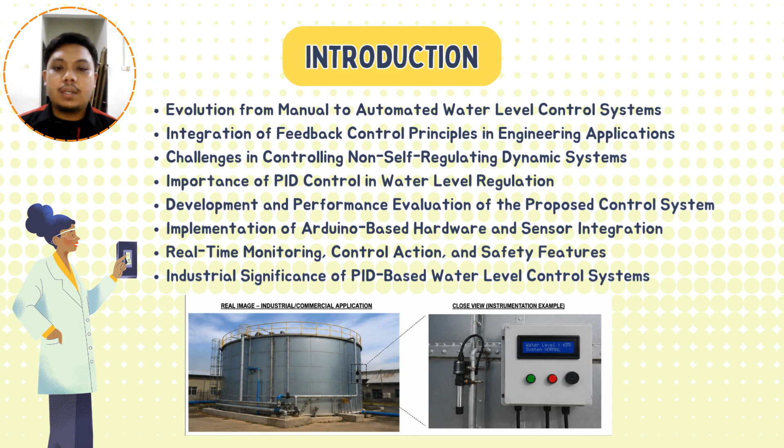Today I will continue this presentation about the aim and objective of the project. The main aim is to design a closed-loop water level control system using Arduino and a PID controller. In this project, a hardware and software integrated system is developed to control the water level automatically. The PID controller is applied to maintain the water level at the desired set point.

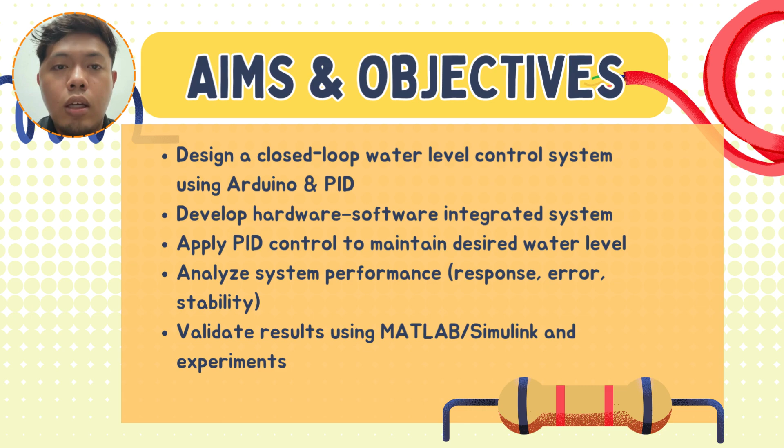Then, the system performance is analyzed in terms of response, steady state error, and stability. Finally, the system is validated using MATLAB or Simulink, and the results are compared with experimental data.

Assalamualaikum, my name is Uzma, and right now I will present the literature review. So, this project focuses on a water level control system which is commonly used in domestic and industrial applications to maintain the desired water level and prevent overflow. To achieve accurate control, a PID controller is implemented.

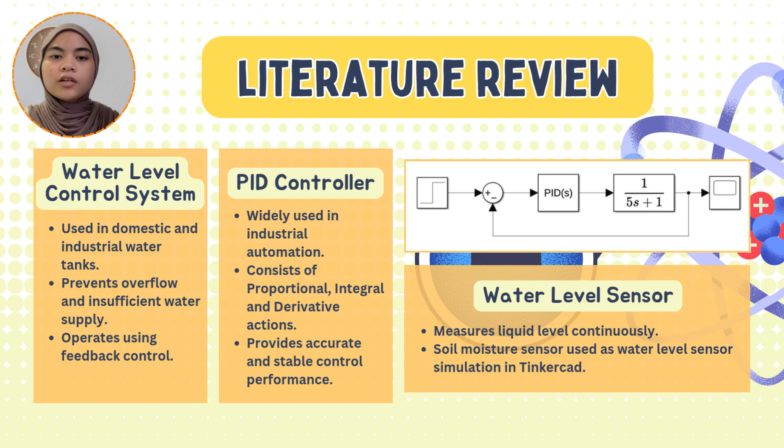PID stands for Proportional Integral and Derivative Controller. It is widely used in industrial automation because it provides stable and reliable system performance. In this project, a soil moisture sensor was used to simulate a water level sensor because Tinkercad does not provide a dedicated water level sensor. The sensor continuously provides feedback to the controller for monitoring and control purposes.

Right now, I will present the theory. So, the PID controller calculates the control output based on the error between the desired water level and the measured water level. The error is calculated using the equation set point minus process variable. The proportional gain Kp increases the response speed of the system.

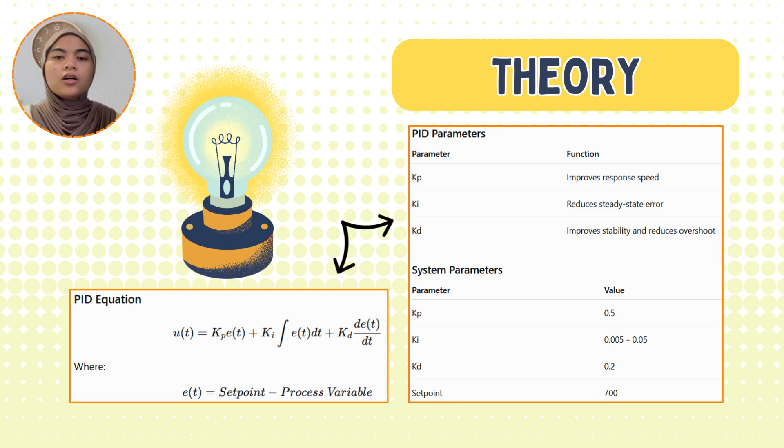The integral gain, Ki, reduces steady state error and helps the system reach the desired set point. The derivative gain, Kd, improves stability by reducing oscillations and overshoot. In this project, the proportional gain was fixed at 0.5 and the derivative gain was fixed at 0.2. Different values of integral gain were tested to investigate their effect on the water level response and overall system performance.

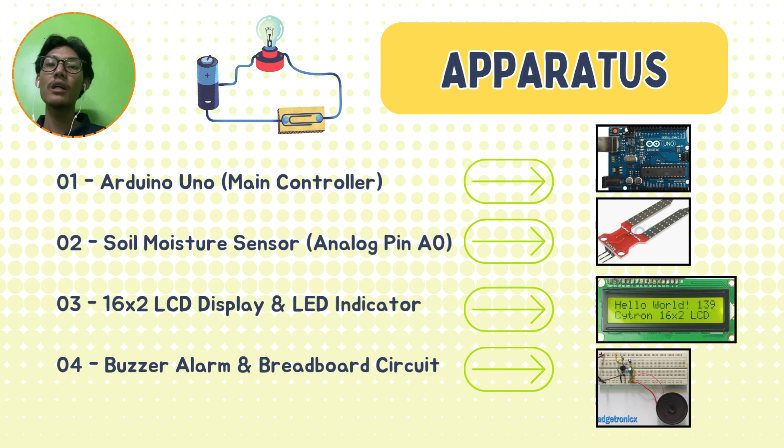The sensor measures the water level and sends an analog signal to the Arduino. The Arduino converts this signal using its 10-bit ADC, producing values from 0 to 1023. Based on this reading, the system displays the water level and activates different alarm states. When the reading is 500 or below, the buzzer remains off. Between 501 and 800, a slow beep is activated as a warning. Above 800, a fast beep indicates a critical water level condition.

So the next slide is the experimental method. MATLAB Simulink is used to create a closed loop PID control system. The proportional gain Kp is fixed at 0.5 and the derivative gain Kd is fixed at 0.2. Meanwhile, the integral gain Ki is tested at three different values: 0.005, 0.02 and 0.05. The water tank is modeled as a first order transfer function and the system response is observed using a scope block.

The performance is evaluated by comparing rise time, settling time, overshoot and steady state error. The results show that increasing Ki improves error correction speed but can cause overshoot. Among the tested values, Ki of 0.02 provides the best balance between fast response, low overshoot and stable water level control.

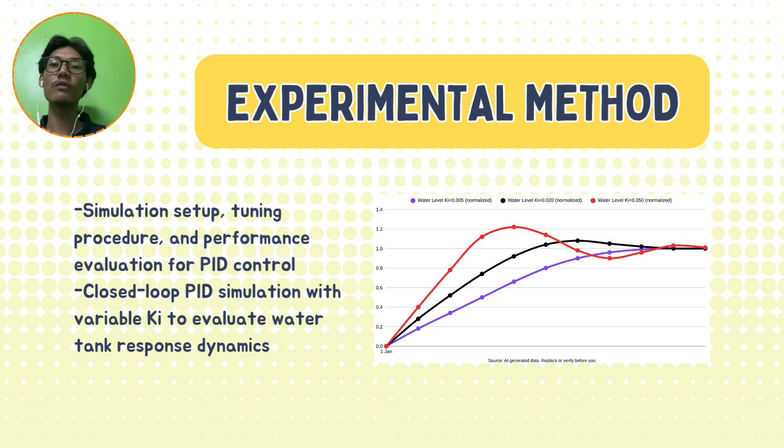Okay, for results and discussion, our PID controller successfully regulates the water level in both simulation and real experiment. The proportional term provides a fast response while the derivative term ensures stability with very little overshoot. The integral term plays a key role in minimizing steady-state error.

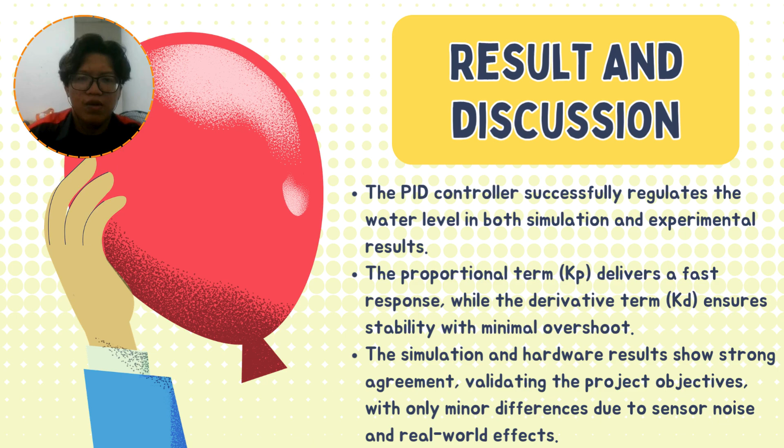Overall, the best performance was achieved by Kp equal to 0.5, Ki equal to 0.05 and Kd equal to 0.2, giving us excellent set point tracking and smooth response. Finally, the simulation and hardware results match well, successfully validating our project objective, with only minor differences due to real-world factors like sensor noise.

For the response graph from MATLAB, let's look at figure 7.4, which shows the PID controller output, or the controller effort, for the different tuning sets. As we can see, all three curves start with a high output of around 250 to 255 PWM. This aggressive effort quickly drives the system to the desired set point. As the error decreases, the control signal smoothly reduces and stabilizes at about 70 to 80 units.

Notice that the response with higher Ki settles at a slightly higher steady-state value, which makes sense because stronger integration is needed to keep the water level closer to the set point. The smooth decay without oscillation shows good system stability.

Now, moving to figure 7.3, this graph displays the error response for the three different Ki values. All responses show a rapid initial drop in error. However, with the lowest Ki of 0.005, the error decreases slowly and leaves the largest steady-state error of about 130 units. In contrast, higher Ki values of 0.02 and especially 0.05 reduce the error much faster and achieve a significantly lower residual offset, down to around 60.

This clearly validates the important role of the integral term in eliminating steady-state error. Importantly, there is no oscillatory behavior thanks to the effective damping provided by our Kd value, which is 0.2.

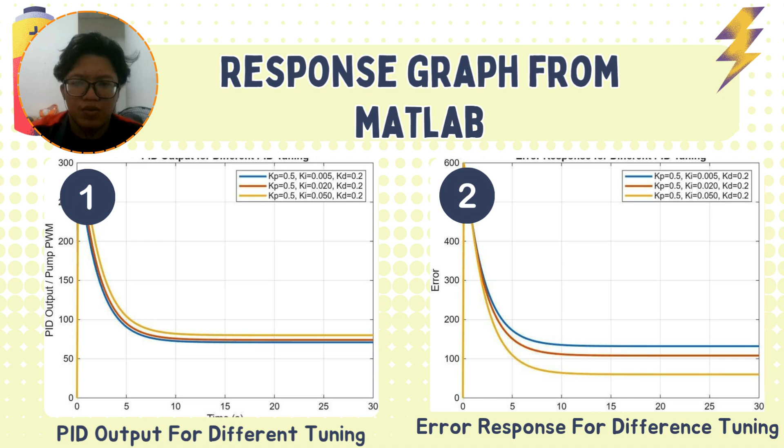Next, let's start with figure 7.1, which shows the water level response for three different integral gain values, keeping Kp at 0.5 and Kd at 0.2. All three curves show a fast initial rise, which indicates strong proportional action. With the lowest Ki of 0.005, the water level settles around 570, leaving a noticeable offset from the set point.

As we increase Ki to 0.02 and then to 0.05, the steady-state level improves significantly, reaching about 595 and 644 respectively. The highest Ki value gives us the best set point tracking with the smallest error. Although it's slightly more aggressive at the beginning, there is no major overshoot or instability. This clearly shows that increasing the integral gain effectively reduces steady-state error, as expected from theory.

Now, figure 7.2 represents the best performing PID parameters, which are Kp equal to 0.5, Ki equal to 0.05, and Kd equal to 0.2. The blue curve shows the water level rising smoothly and settling very close to the set point with minimal overshoot and a settling time of only 10 to 12 seconds.

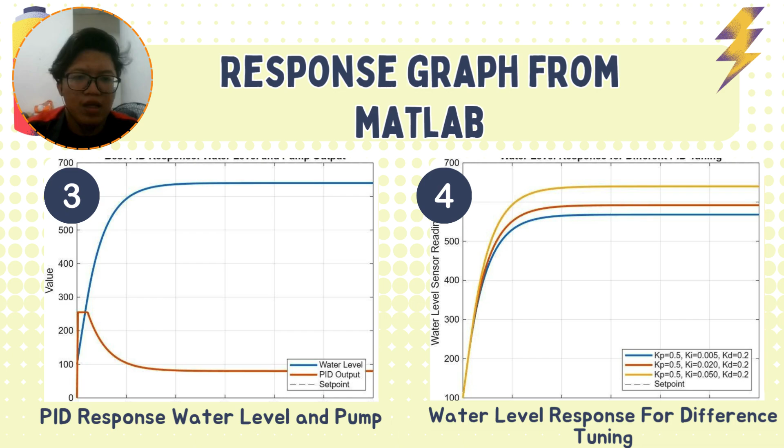The orange curve represents the pump output. It starts high to correct the error quickly, then decreases smoothly to a low value to maintain the level. This demonstrates excellent control action, strong initial effort followed by efficient steady-state operation, and confirms that our PID algorithm works well in both simulation and on the actual Arduino hardware.

Now, I will close this presentation with the conclusion of this project. This project successfully designed and implemented a water level control system using an Arduino Uno and a PID controller. The system integrates both hardware and software components such as a sensor, LCD, buzzer, and LED. The results show strong agreement between simulation and experimental data, which validates the accuracy of the system. Any minor differences observed were mainly due to sensor limitations.

The PID controller proved to be effective for controlling a non-self-regulating system. Overall, this project provided useful skills that can be applied in industrial automation, process control, and mechanical engineering.